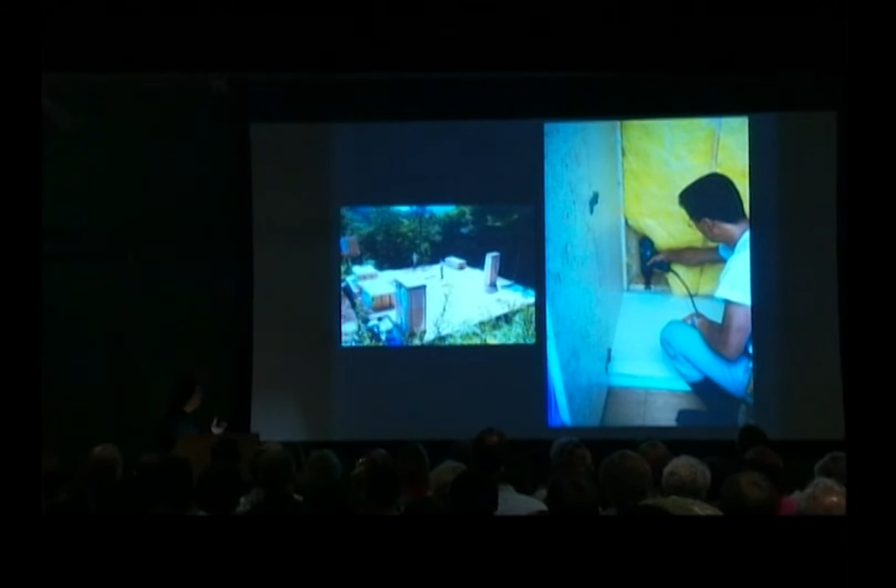This is the prototype. The width is 3 feet, the height is 8 feet, and the depth depends on the type of furniture. Insulation is already installed, painted inside and outside. Next, please. We just make the basic foundation. I bring in the already built furniture and connect the furniture with the foundation vertically and horizontally. Next, please. In one day, all the furniture units are installed. Next day, we put the roof on and finish the inside.

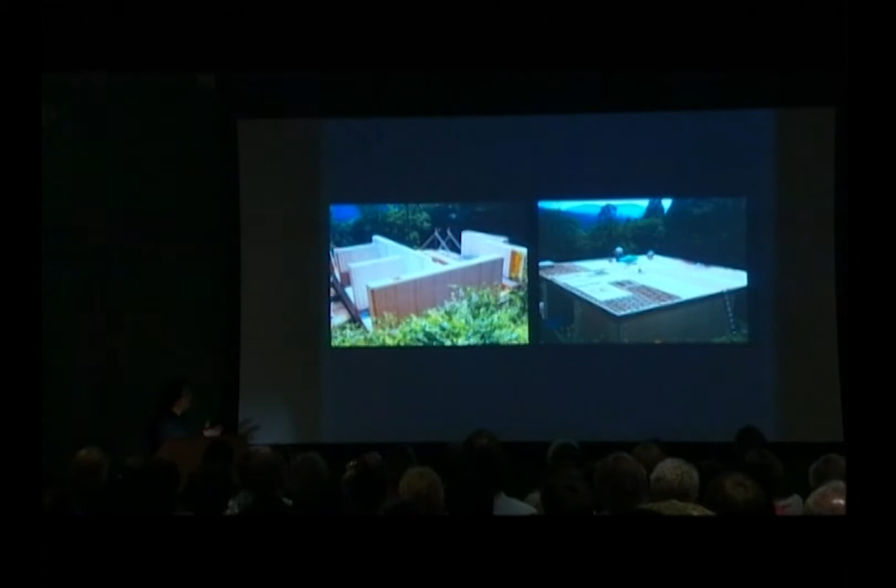Next, please. And we don't need to depend on skilled carpenters. Anybody can build it very easily. Whatever you see, the cabinet, bookshelf, all of them are structure. Next, please. Also, I used the same idea differently in China when I was asked to design a house there, because I was not allowed to do the construction administration. So I decided to use this furniture system because I don't have to supervise the construction. I just have to supervise the quality of the furniture in the factory.

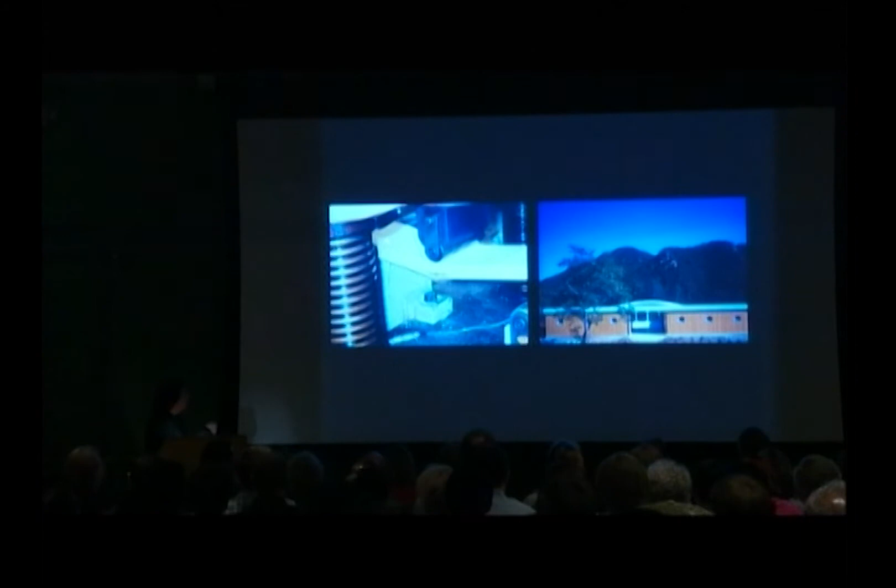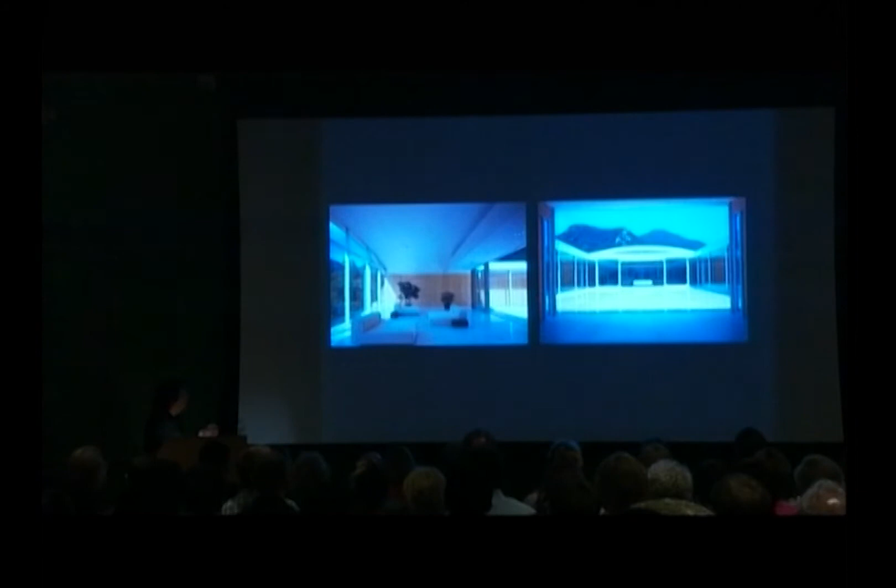Also, I wanted to use some local material since timber was rather expensive in China. And I found some plywood made of bamboo. So I decided to make laminated bamboo, and I made some samples and brought them back to Japan to test. Laminated bamboo was much stronger than wood. So this time I made the furniture structure with laminated bamboo, and the finish outside, and next please, also inside, everything is finished with bamboo. So structurally, it's furniture made of bamboo and finished with bamboo. Next, please. And this is a recent furniture house built in Long Island, in Sagaponack.

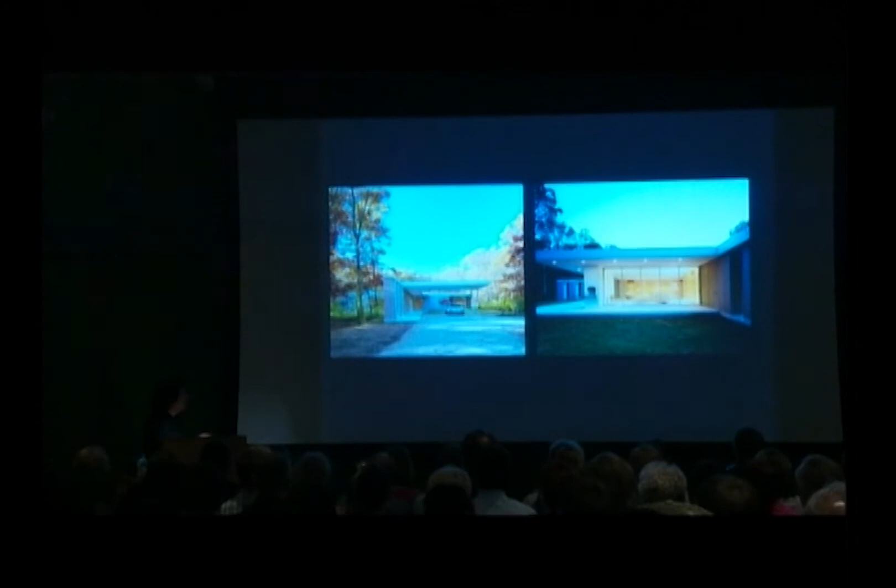This house further develops the furniture, because in the previous system the furniture was made of the so-called 2x4 balloon frame structure with plywood. This time, next please, there are no frames. There is only plywood with a finger joint. So three sides of the furniture itself support the vertical force and the lateral force. There is no framing inside of this furniture.

Next please. And also the furniture idea was further carried on to other projects. This is also a recent project. It's a library for a university. I was asked to make a rather classical order because all the other buildings on campus are classical brick buildings. And when I designed this library, I put all the bookshelves right and left, and the middle part is the reading space, atriums.

Next, please. This atrium has floating meeting spaces and classrooms, and on both sides of the building, next please, there are the shelves. Actually, these are precast concrete shelves. We just put in steel shelves to make the bookshelf like this. So this precast structure is used as a bookshelf to support the floor by itself, so that without any other structure, the bookshelf itself becomes the main structure of the building.

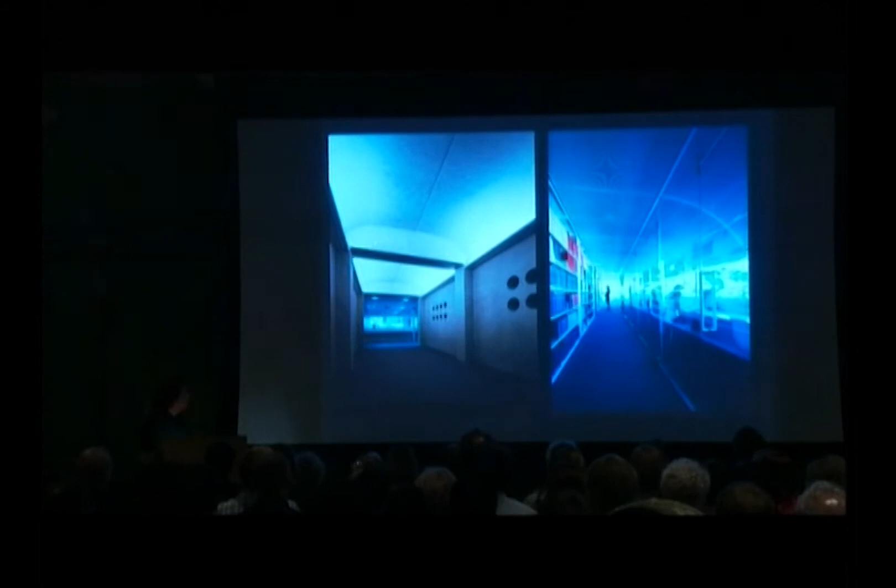So my idea is using shipping containers as the main structure. These are used shipping containers. We just borrowed them from the other side of the river in New Jersey. We used local containers only during the period of the exhibition. Then after we dismantle, we return them to the original place. So we don't have to carry the containers, because this is an international standard. Wherever we go, we can borrow local containers.

It's the same standard. And I made a checkerboard pattern in order to minimize the number of containers and minimize the weight of the building itself, because it was built on a very old wooden pier, and also to create shadow to emphasize the three-dimensional nature of the container. Next, please. And the roof is supported by paper tubes. The diameter is 2.5 feet. The wall thickness is 3/4 inch. It's 10 meters, about 33 feet long. And all the containers are connected with the standard container connections.

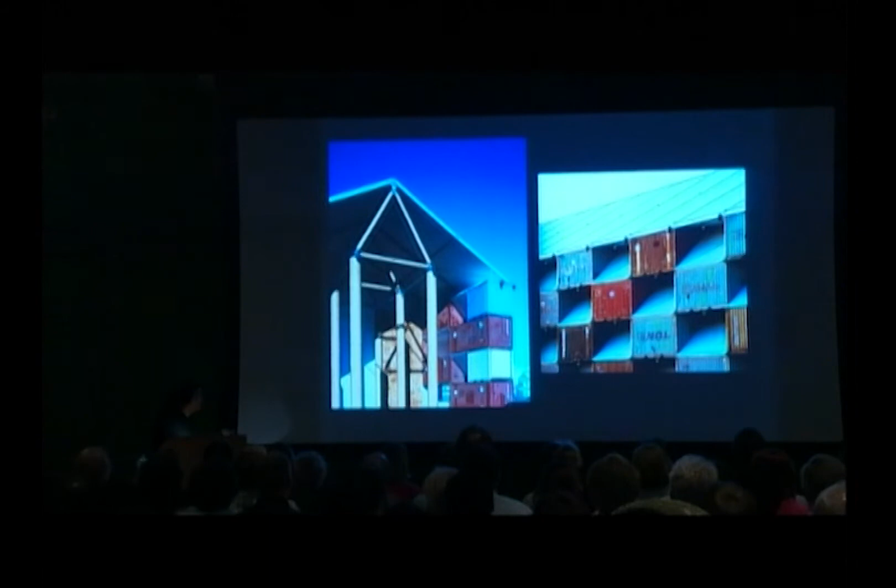Next, please. This is the main corridor with Gregory's photos in between the columns. Next, please. Then last year, the museum was brought to the Santa Monica Pier in Los Angeles, and the size of the site is different. In New York, it was just a linear building, but in Santa Monica, the site given was almost square. So instead of making one linear museum, I made two corridors. Also, Gregory asked me to expand the museum with an additional theater in between. So I put two linear galleries, creating a space in between. Without any additional containers, we just put the roof on to create a new theater space. As you see, the galleries are on both sides.

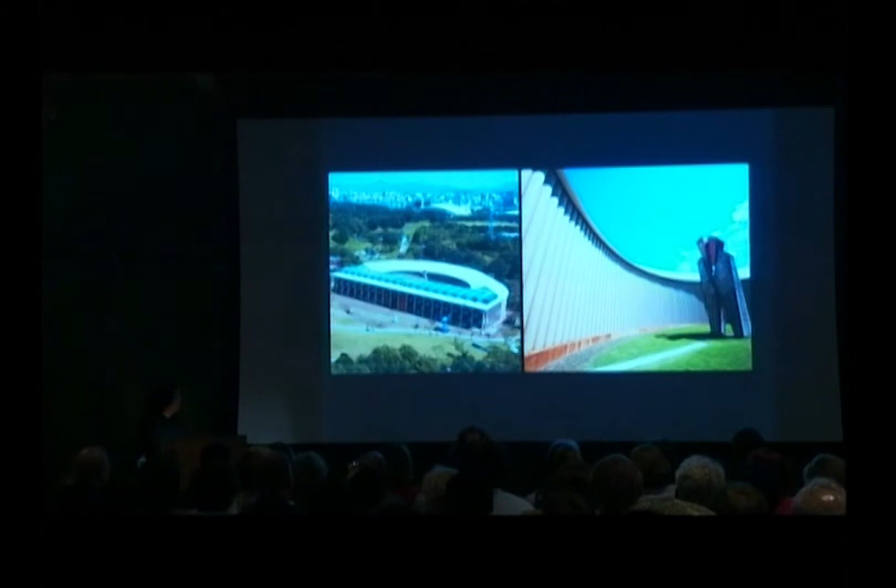Next, please. This is another temporary museum built in Seoul, South Korea. Because it's supposed to move, I made it out of paper tubes and also some 10-foot containers. This is the existing sculpture, in Olympic Park. Because of the shape of the site, and because I was asked to make two different galleries, I made a D shape, creating a gallery with paper tubes and a gallery with containers. Even the roof structure is made of 40-foot containers spanning the two walls. Next, please. This is the container gallery with 10-foot containers and 40-foot containers as the main beams, and this is the paper tube gallery with paper tube trusses.

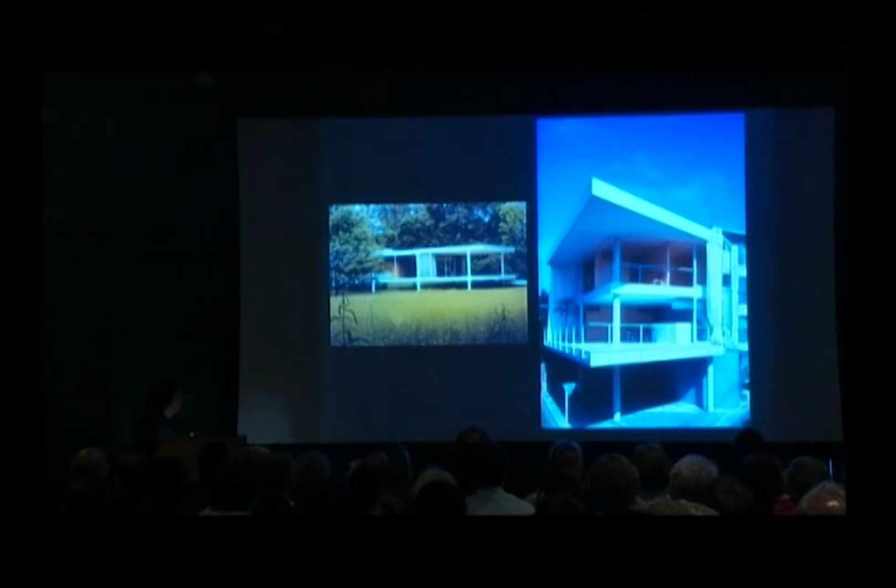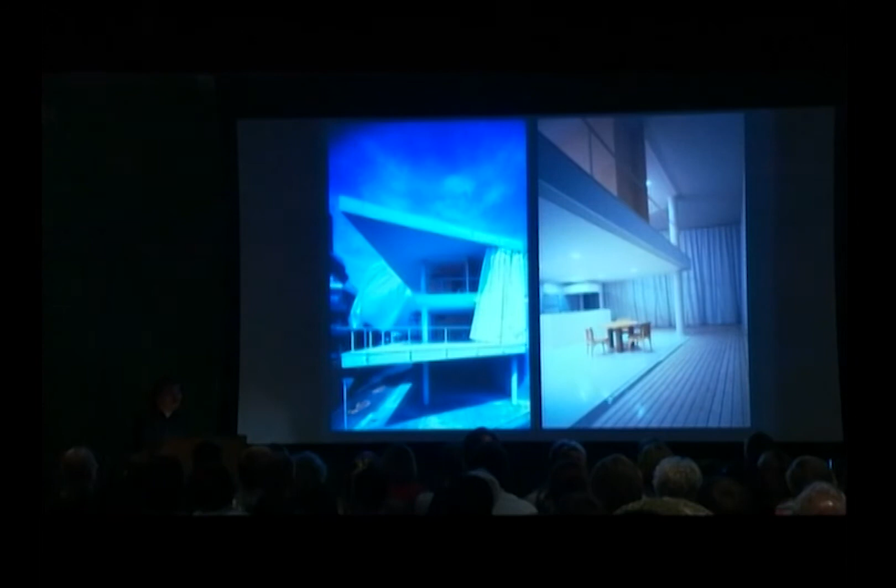Next, please. So this curtain works as shading and also to keep privacy. And when the curtain is blown away, you can extend the limit of your house to the street. And in the evening, when you close the curtain, the space is three-dimensionally connected. Also, as you know, Mies van der Rohe is the architect who invented the so-called curtain wall. Curtain wall is glass with metal frames for the building. Instead of using the Miesian curtain wall, I just used a curtain to design a curtain wall house.

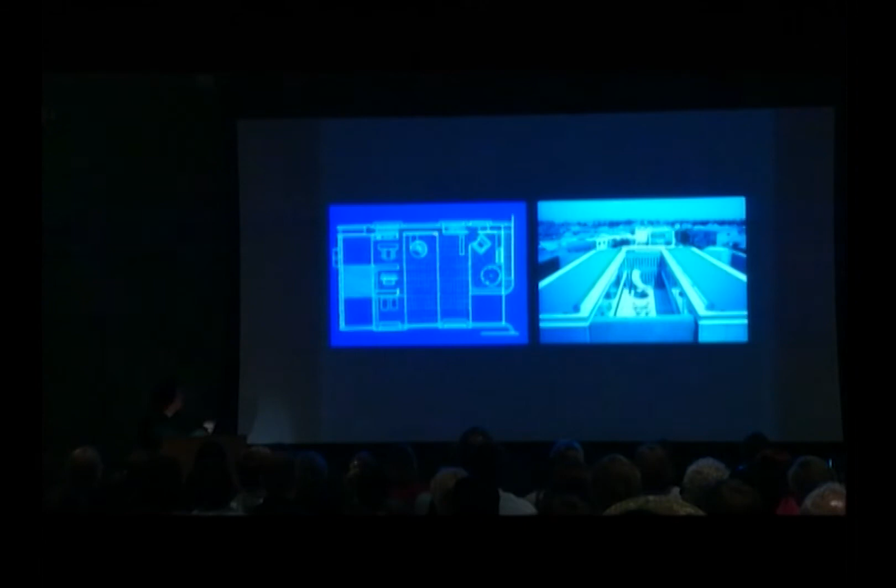This is a house called picture window house. Usually a picture window is a square window on the wall, framing a beautiful landscape like a painting. Instead of making the square picture window on the wall, I made the building itself a picture window to frame the beautiful horizontal ocean view.

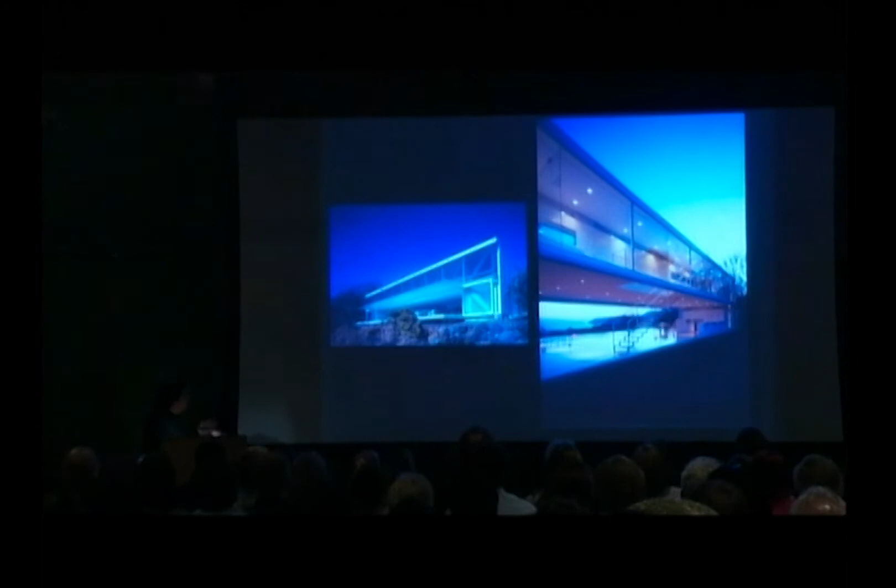So the second floor works as a kind of truss with the bedrooms, spanning from side to side, and when you open up all the sliding doors, front and back, the garden is connected with the indoor, and then it's connecting to the ocean view. Next, please. As you see, this is a horizontal picture window when the sliding door is open. Next, please.

Then I wondered whether this column is really structure or not, because the wall can be structure, and you maybe don't need columns. So I calculated the building with just columns, without any walls, and I found out there are enough columns to support the roof. Then I calculated just with the walls, without any columns, and there are also enough walls to support the roof. So structurally, the meaning of the columns and the wall is quite ambiguous. For this wall-less house, I tried to clarify or investigate the meaning of the fundamental architectural elements, like column, wall, floor, roof, and so on. Next, please.

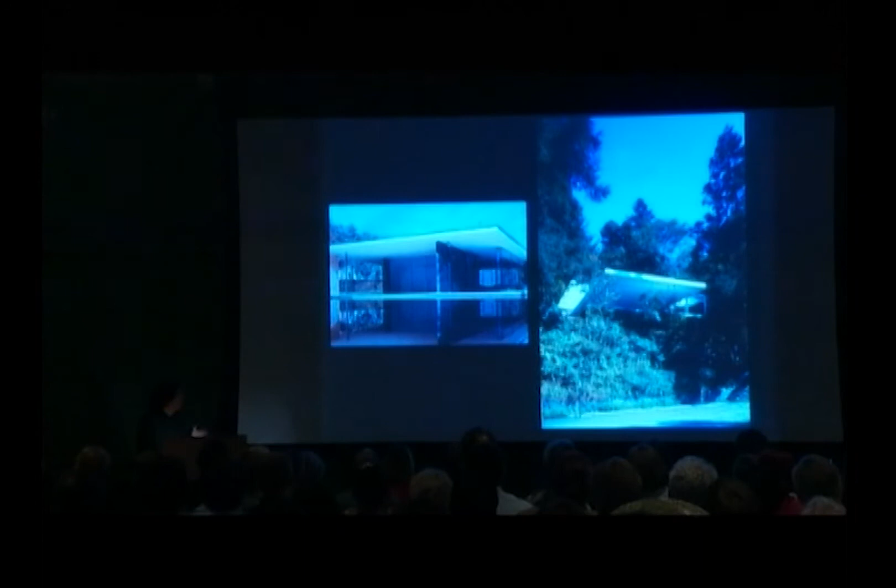And as this house was built on the hill, usually when you have to build on a hill, you have to make a floating platform. But I didn't have the budget to do it. So what I did is just dig half of the ground and put the mud in front to make a flat platform. However, the hill still continues this way. So this wall usually has to be a cantilevered concrete retaining wall to support the pressure of the earth. Instead of making a cantilevered concrete retaining wall, I just made this concrete floor curved.

It's just an upside-down arch, so that the pressure of the earth is naturally transferred to the floor. So this curvature has a structural meaning. It's not a cantilevered heavy retaining wall. It's just part of the floor, curved to transfer the load naturally.

And three sides of the house are just sliding glass doors, which can be opened. This canopy can come down to close the window when nobody is here. So we just open up the canopy and open up the sliding glass doors to extend the inside of the house outside.

And there are only 3 very thin columns, only 2-inch diameter. In Japan, we have lots of earthquakes. It's usually impossible to have such a small column. So obviously, since it's so small, it's carrying only vertical force.

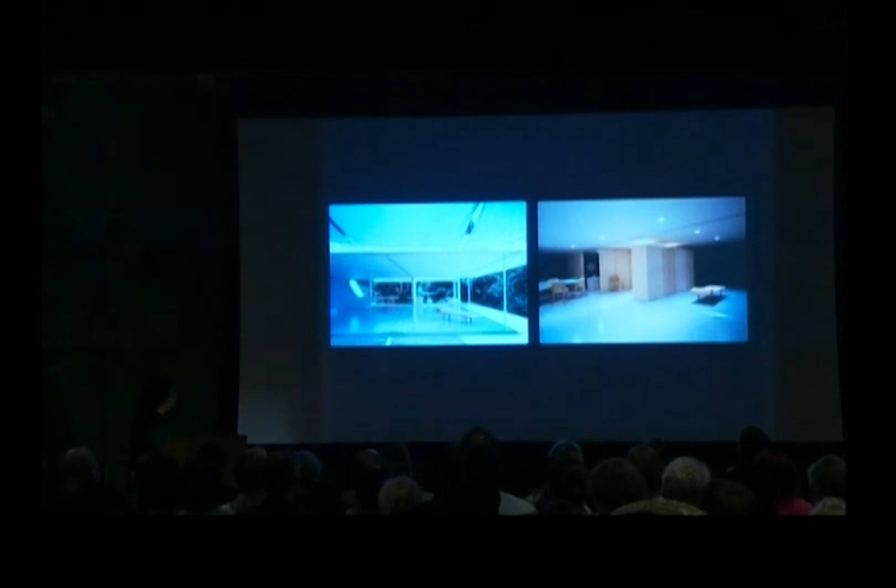This is a house called the 9 Square Grid House. There are 2 parallel structural cabinets, creating 1 square floor plan, which can be divided into 9 small squares. These are sliding doors. You can open them to have 1 big square floor, or divide it into 9 small squares, or into linear spaces or middle-size squares. Depending on the occasion and the season, you can divide the house differently.

Here only 2 rooms have a name: the bathroom and kitchen. Other than that, there is no room with a name, like bedroom or living room. This could be the bedroom in the summer, on the northern side, which is cooler. But in the winter, you can put your bed on the south side of the house, which is warmer. In case you fight with your wife, you can separate the bedrooms.

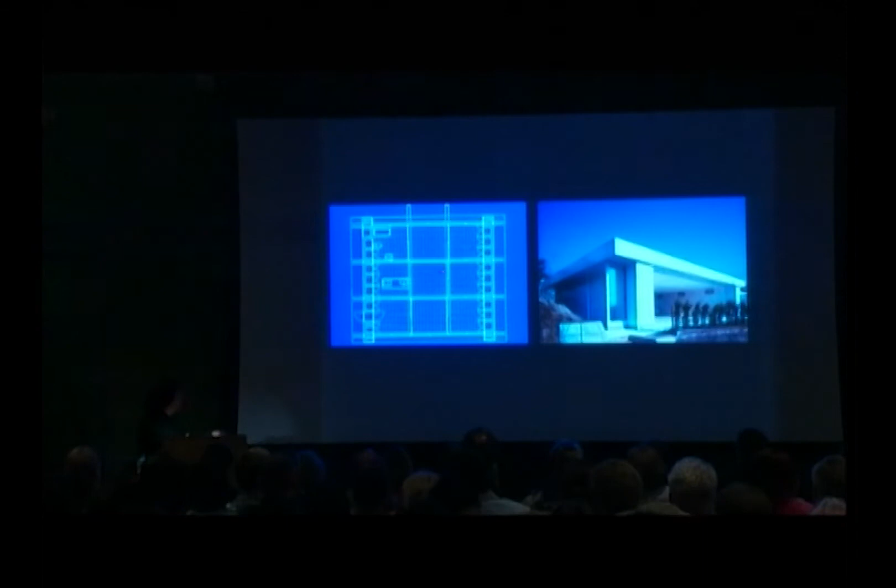Next, please. As you see, this is just 1 square space with all the cabinets, the air conditioning, everything inside the structural wall. You can divide it into small rooms.

Next, please. This is the Paper Art Museum, the first phase. There are 2 projects. The first phase was renovating an old factory into a gallery, and the second phase was building a new building. In the first phase, the budget was very limited. What I did was only limited things: removing the existing wall, exposing the existing steel columns, and putting in a standard overhead garage shutter with fiberglass panels.

Usually, with an overhead shutter, when it's open, it comes inside the space. But instead, I put it the other way around. So when it's open, the shutter goes out like this, to create a nice canopy connecting inside and outside with some intermediate space in between. So it's nothing special, just a standard element used differently.

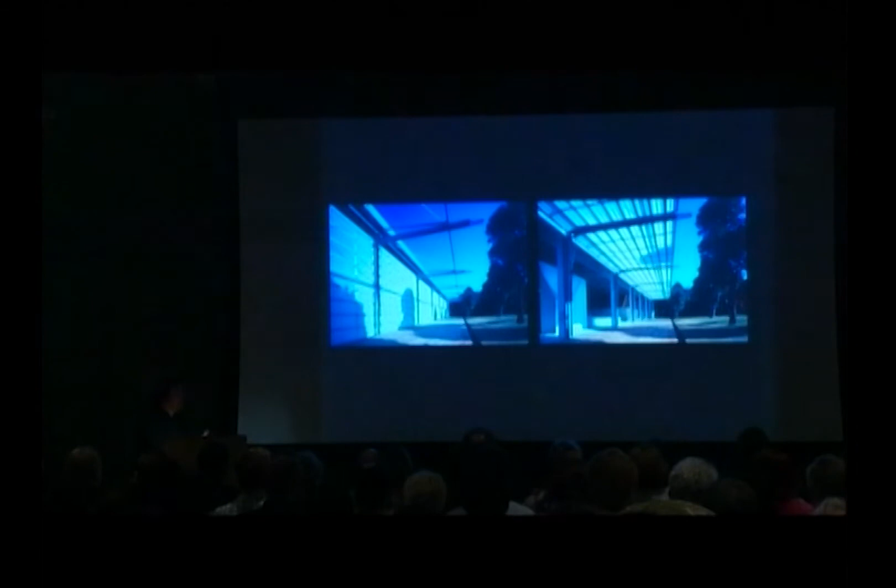Next, please. This is the second phase of the Paper Art Museum. It looks like 1 building, but actually there are 2 individual structures: on the south side, 3 floors of administration, and the northern structure is 3 stories of galleries, connected with a bridge and a membrane roof. This is another industrial shutter with double-glazed fiberglass panels. When the museum is open, it's just open, and this semi-indoor, outdoor space can be used for exhibitions.

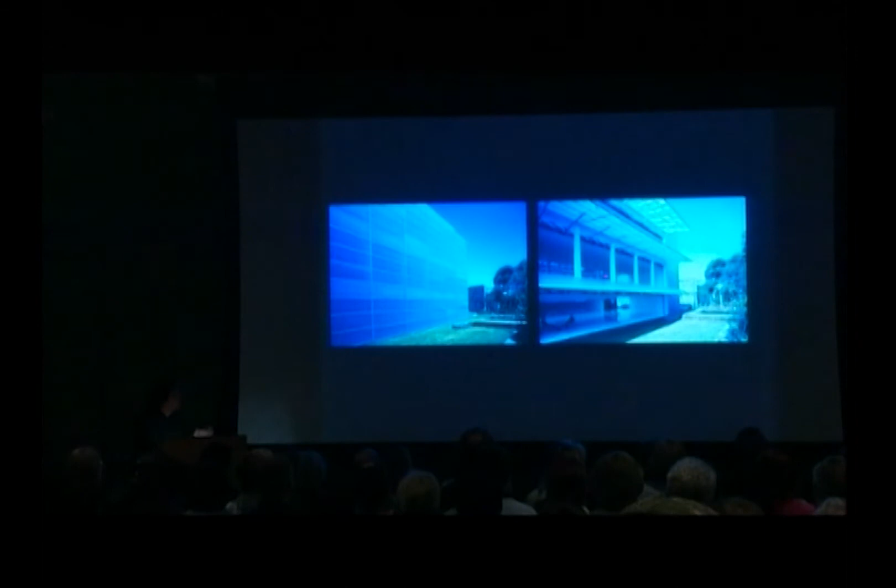Next, please. On the south side, the administration part, you can open up this lightweight fiberglass panel to make a canopy, and also open up all the sliding doors to enjoy the garden.

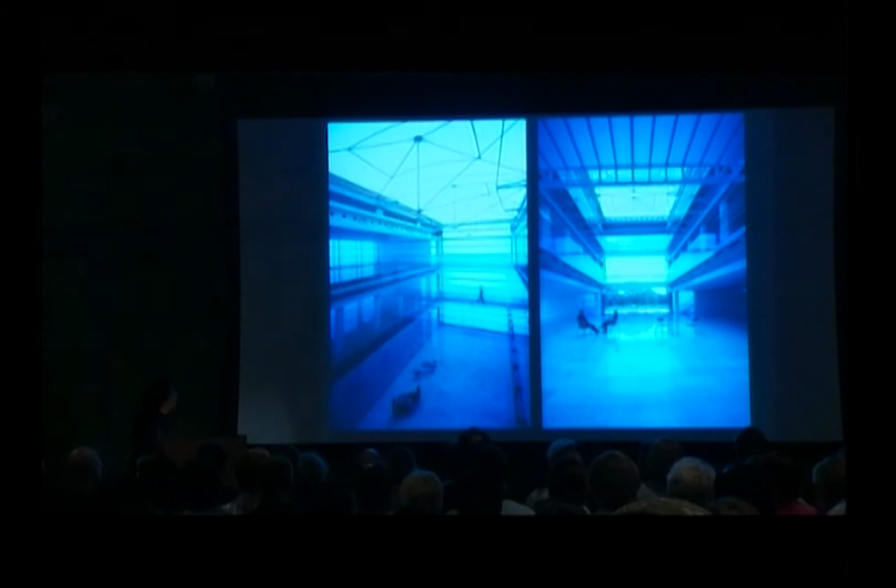Next, please. Also inside, when the museum is closed, this shutter comes down, and these glass sliding doors open totally. When the exhibition is bigger, we can use the big square space for the exhibition. It depends on the type of exhibition you are bringing. Next, please. This is a small restaurant in Tokyo.

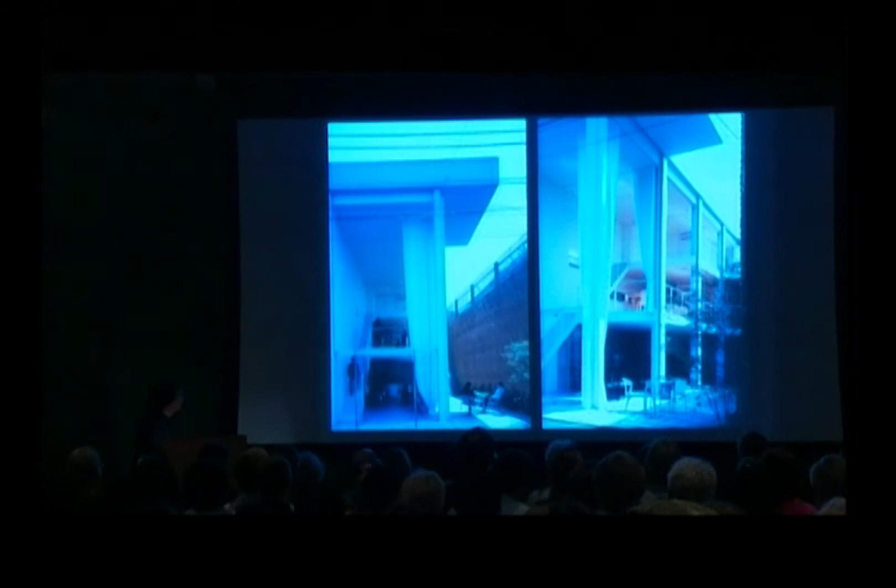Next, please. This is another house for the photographer. I call it Shutter House for the photographers. And because the site is rather very enclosed, a dense area, there's nothing to see outside. Also, it's difficult to keep the privacy. So it's rather a closed house. So I prepared several different small courtyards inside of the site, connecting the inside of the house with the courtyard. And this outside wall, all of them are glass shutters.

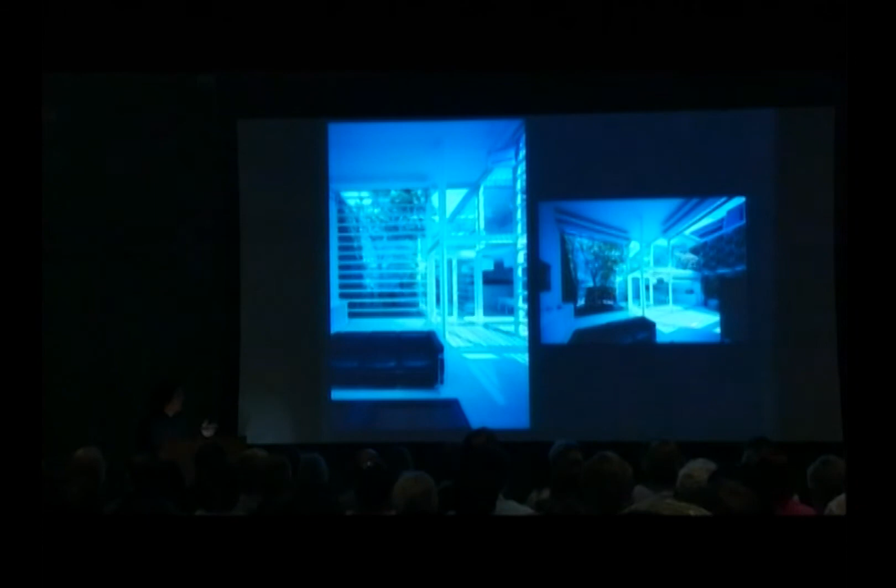Next, please. So when the glass shutter is closed, you just see the courtyard outside, but when it's open, the living room and dining area is totally connected with the courtyard in front and also the side. All the floors are totally connected as one open floor with the living room, dining room, kitchen and so on. Next, please.

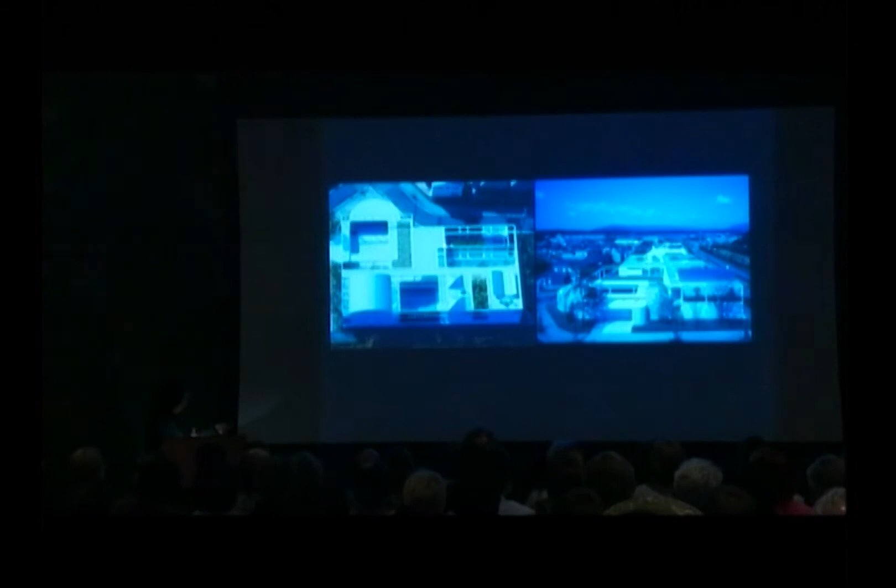This is another house. It's a rather big house, over 12,000 square feet. This is quite a big house for Japan. And this is the porch and parking, living room, swimming pool, bedrooms and courtyard. I want to see the courtyard from everywhere. And this is the grandmother's quarter, the family room and kitchen. Next, please.

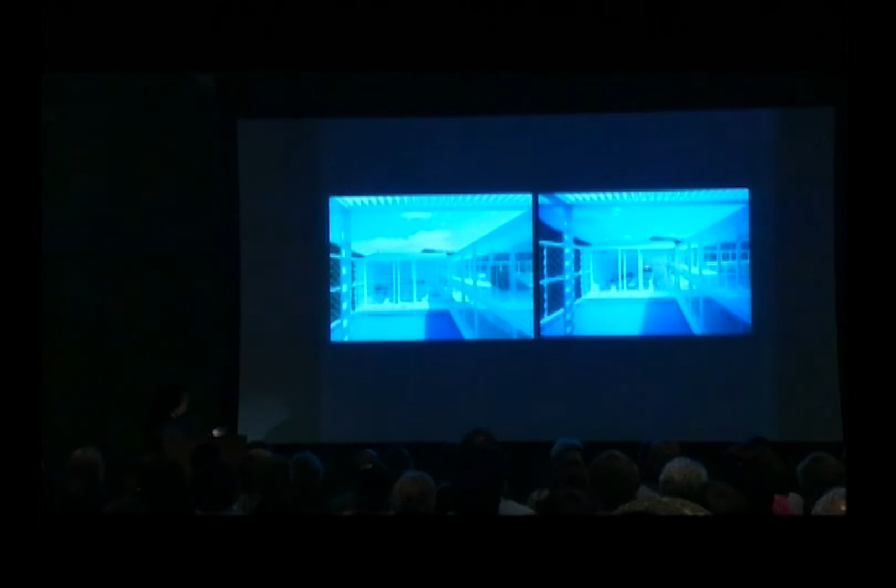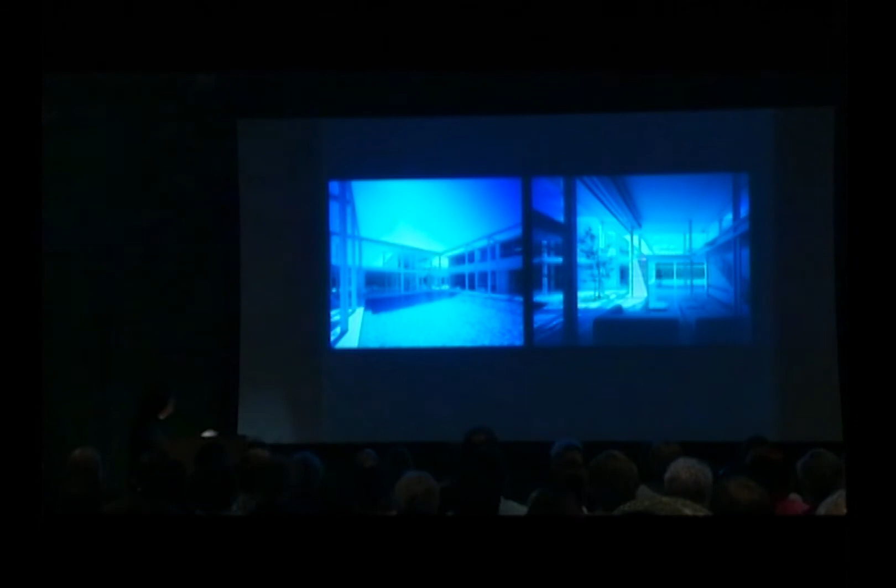This is the entrance porch. You come into the entrance. Next, please. Then this is the main living room. And again, this is the glass shutter. When it's open, the living room is totally connected with the swimming pool. You can jump into the swimming pool from the living room directly. Next, please. And this is the family room. Again, this is the shutter connecting the family room with the landscape outside.

Next, please. This is the most recent project, just built in Ginza, Tokyo, the most expensive land in the world. And sorry, this is not a professional photo because it's just finished. This is a building for the Swatch Group in Switzerland. Swatch, as you may know, owns many brand names like Omega, Tissot, Calvin Klein, Blancpain, Jaquet Droz, whatever you name it. Most of them are Swatch Group.

And this was an international competition. I was very lucky to win because I didn't respect the program. I usually respect the given program, but this time I thought that the program given was not very nice, and I took a risk to propose something totally different. This is a building for 9 different brand name boutiques, Swatch, Omega and so on, and also customer service, office, and an event space on top.

And the given program said because of the narrow width of the building, they can have only 2 boutiques on the ground floor, 2 on the second, 2 on the third, 2 on the fourth, and the basement, so that only 2 boutiques have a chance to be exposed to the street. I thought that is unfair for the boutiques which have to go to the basement or second, third, fourth floor, but that was the way it is. Then I just made my own. I took a risk to just change it totally.

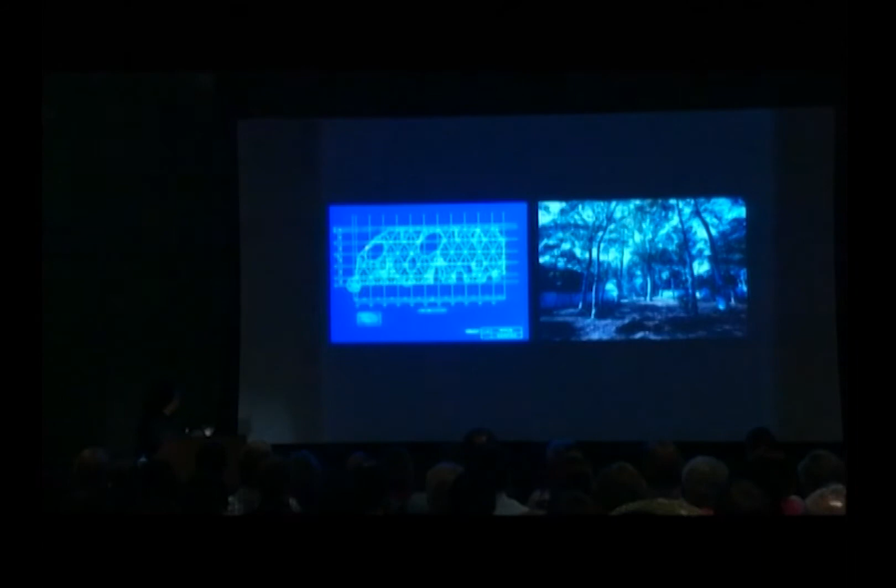Let's say if you have the usual square grid, there are 4 beams intersecting to support the columns. At least you need 3 beams to stiffen the columns, so you can eliminate only 1. But because I took the triangular grid, 6 beams are intersecting, so you can still eliminate 3, with the remaining 3 beams stiffening the column. So because of 6, you have more freedom to eliminate whichever you need to remove because of the condition of the trees and the roots, so that I could have the openings wherever the trees are.

Next, please. This is a 3-story high duplex apartment. There are 11 apartments. Each one has its own entrance on the ground floor in the pilotis. This photo was taken in the winter. That's why you can see the holes. But in the summer, the leaves cover all the roof, making shading on the roof. So it's very cool in the summer.

Next, please. This is a house called Naked House. The house was built in the middle of a rice field, and the request of the client was very unique. First of all, they said they want to have the house like a greenhouse, which exists in the neighboring area, and also they want to have a big living room, a common space to share with their family members. They said they don't need a big private room with privacy, because they like to spend most of their time in the big common space.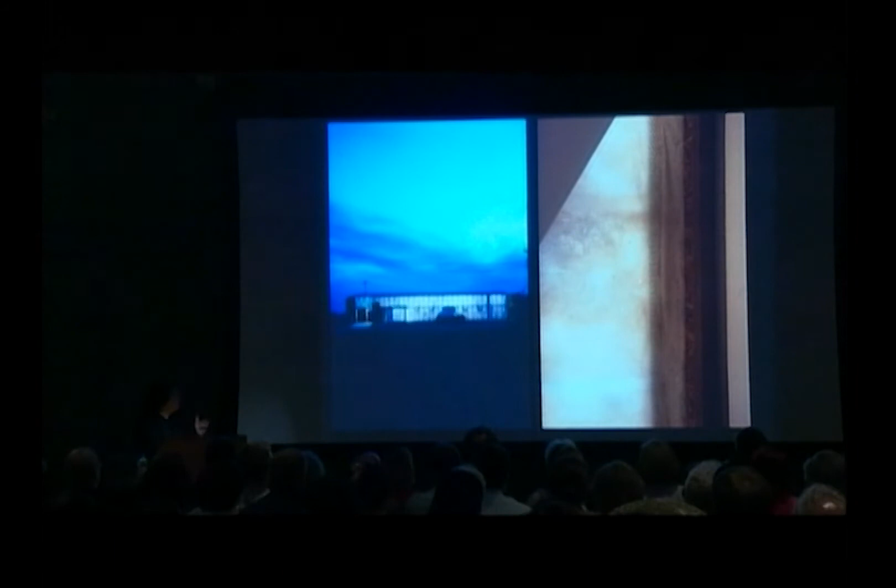And because they wanted a house like a greenhouse, I used the material used in greenhouses. This is the corrugated fiberglass panel, but I made 2 layers, vertically and horizontally, to stiffen each other, and also to keep the air gap in between for insulation. And inside the wall, I made my own translucent insulation material using noodle-shaped foam core, which is usually used for packing fruits, put in clear plastic bags. And I made an extra layer with bubble packing material, but still translucent. Next, please.

So inside, as you see, the wall is all translucent. And there are 4 small individual spaces with traditional Japanese tatami mats. The 2 sides of each room are made of sliding doors, which can be removed to connect all the rooms together to make linear tatami rooms. The grandmother doesn't like air conditioning. Actually, it's impossible to put air conditioning inside the movable box. And the small child likes air conditioning. These are the air conditioning units for the common space.

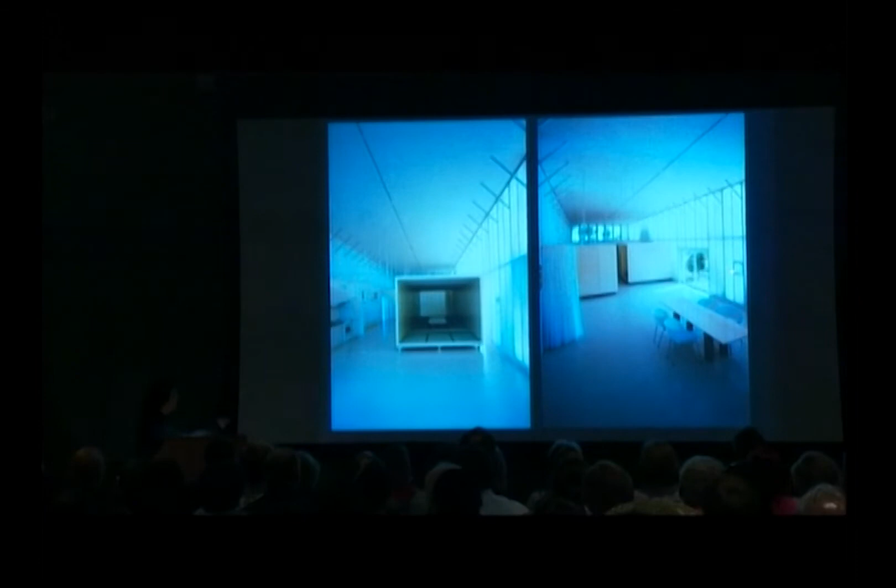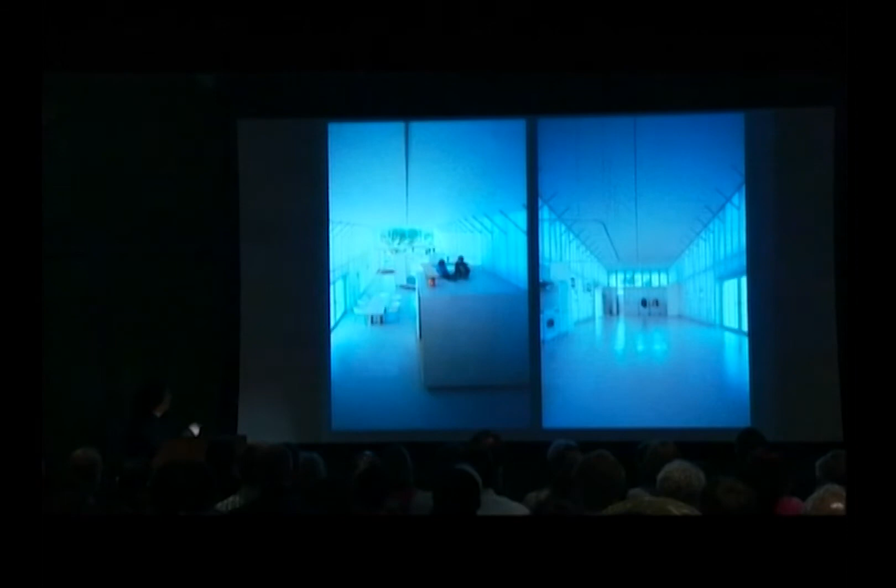So if you want to have your air conditioning, you just move your box, attaching it to the air conditioning, so that it becomes your individual air conditioning. And there is no window, but if you want to see outside, you just move your box to the window. It becomes your private window. Next, please. And all the boxes can go outside to the garden. Sometimes they hold a lecture, so it's a totally open space, and kids can play and study on top of their own boxes. Next, please.

This is a 6-story office building in Osaka, Japan. This time I invented fire protection for steel in wood. This is a picture showing the testing process to get government permission. I took advantage of the characteristics of wood as fire protection. This is a steel column with plywood. I wanted to use the wood as fire protection for steel and also as the final finish of the building itself, so that we can eliminate many materials.

Usually we have to spray ugly fire protection, and this has to be covered by gypsum board, and you finish with wood, timber, stone, whatever. So there are many layers. As you know, wood doesn't transfer heat easily. So first of all, the heat is not transferred to the steel easily. But when the temperature goes much higher, of course, wood can be burned.

Then it becomes charcoal, and the charcoal is a perfect fire protection material. So I tested this method, and I found out 1 inch thickness of the plywood works as a half-hour fire protection, and 2 inch thickness of the plywood works as 1 hour fire protection.

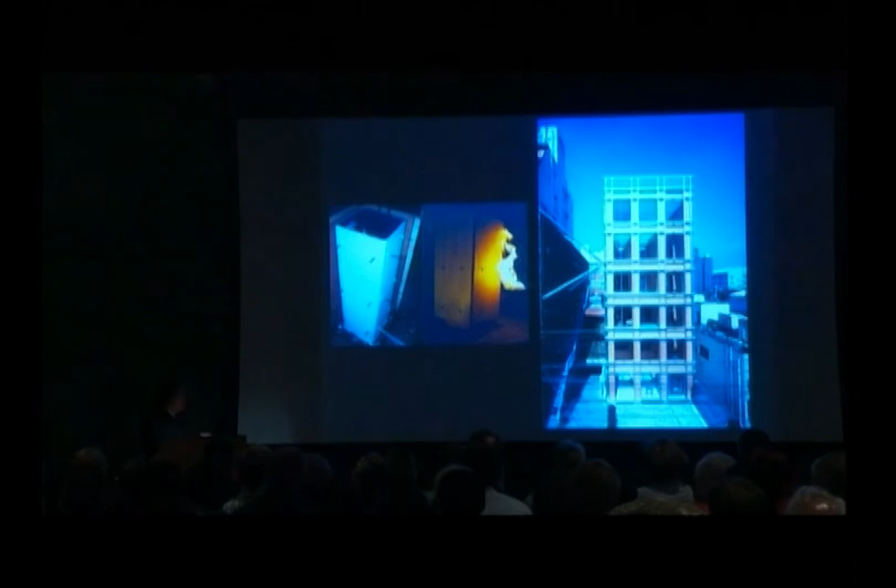Next, please. So the building was finished with this plywood. Depending on the level, the thickness has to be adjusted depending on the fire regulation. So this then works as the final finish of the interior itself.

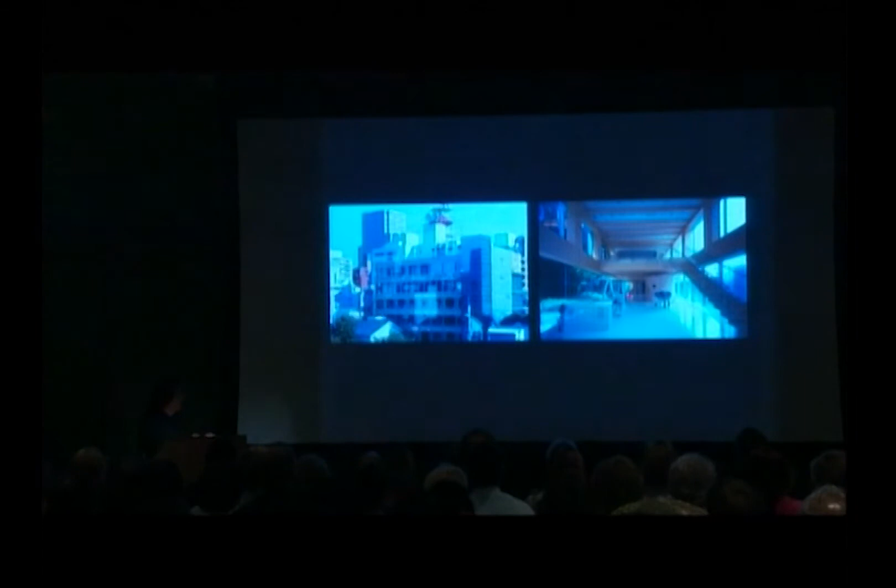Next, please. And also I work with plywood because plywood is so cheap and strong. I made a kind of pre-bent arch with the plywood. It's called LVL, laminated veneer lumber, to make a kind of woven feeling with the vertical and horizontal plywood. This is a small daycare center for the hospital.

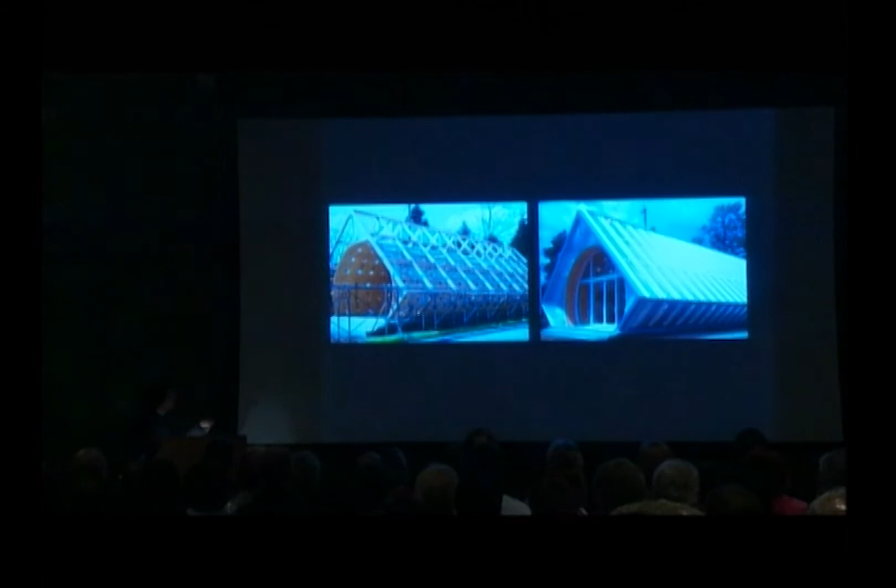It's in northern Japan with heavy snow, and because it's so thin, it can be deflected by wind. I put the timber frame connecting with the steel lattice truss, stiffening each other, and finishing with corrugated stainless steel and fiberglass material to bring light inside.

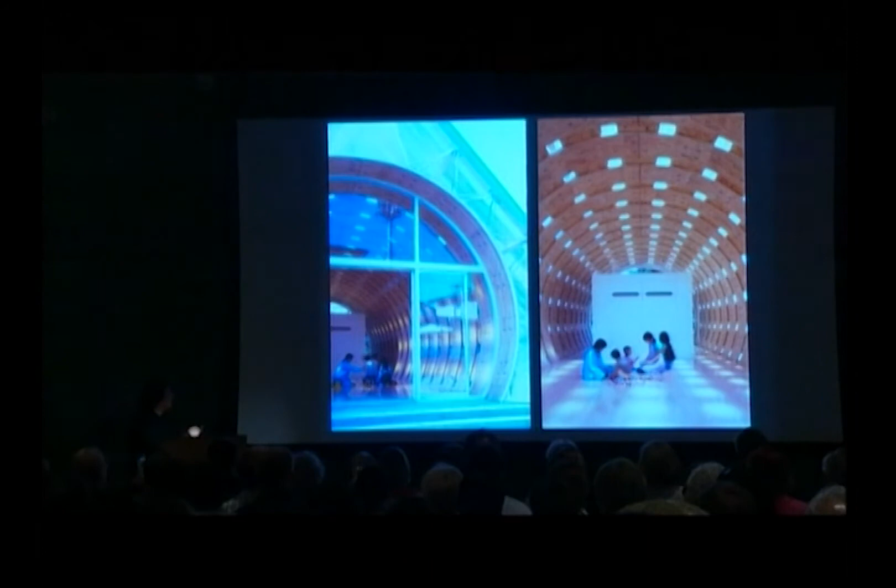Next, please. In the summer, through the space gap between the square and the round shape, we just ventilate hot air, and in the winter we keep the hot air inside for insulation, and natural light comes into this daycare center.

Next, please. The same hospital asked me to design the gymnasium. Because it's a residential area, I didn't want to make a big volume on the ground. So I put the main body of the gymnasium underground, and I just put the roof on top of the ground. And again, I use the LVL. I try to minimize the quantity of the timber.

This is a sectional diagram explaining the roof structure. In the longitudinal section, you put the arch following the diameter, so that all the sections follow this curvature. Perpendicular to that, the curved arches are put in parallel, so the section is always horizontal. It doesn't follow the curvature. With the two layers, at the bottom and top there is a gap because this one is horizontal. And I put small timbers to create the truss.

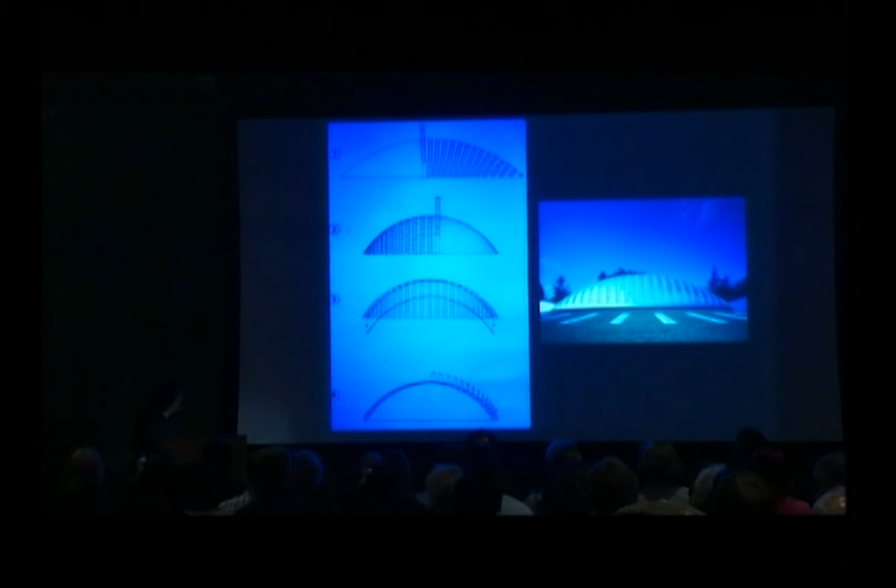Next, please. So as you see, the pre-bent arch follows the curvature, and perpendicular to that, it's almost horizontal, creating the gap and creating the truss with the additional timbers. And there is space to bring natural light inside the gymnasium. Next, please. And the wall is translucent, bringing indirect light into the swimming pool.

Next, please. This is a presentation I submitted for the competition of the Pompidou Center in Metz. Metz is a city near Germany, east of Paris. The site was quite big, and this is a site plan with the main train station, a very famous cathedral, and downtown, the old town. Our site is the other side of the train station. It's a kind of open space, there's nothing around.

First of all, I worked with the landscape architects to design the park. Usually we design the building and ask the landscape architect to put the trees around, but I did it the other way around. I asked the landscape architect to put the green park, then I put a big roof on top of the green, because I wanted to make the inside of the museum an extension of the park.

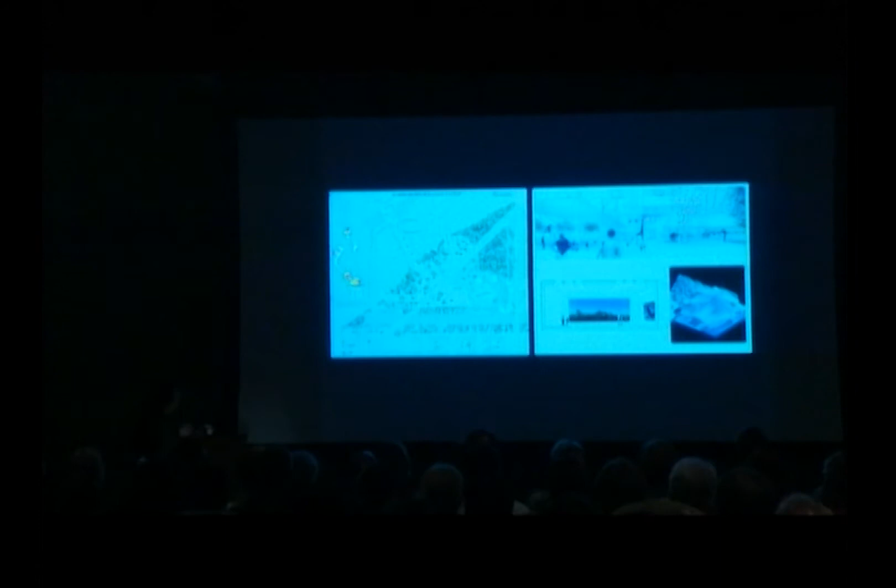The second tube is heading to the main train station. This main train station was designed when Metz was occupied by Germany, so this is a very interesting German architecture, and it became part of the city's monuments. So the second tube is framing the train station, and the third one is framing the future sculpture in front of the train station.

Next, please. And this is showing the development of the roof structure. This is the building in computer graphics. The construction started last November and is supposed to be finished at the end of next year.

The idea of the roof came from the traditional Chinese bamboo hat. When I saw this Chinese hat, I thought this is very architectonic, because woven bamboo is the structure, like a roof. And the oil paper is the waterproofing, and underneath there are dry leaves as insulation. It's just like a roof. So I used this pattern and designed a kind of wooden truss. And the whole roof shape itself is a hexagon, and also each pattern is a hexagon.

As you may know, the hexagon is a symbol of France. The shape of the country, France, is a hexagon, so for the French people, the hexagon is their symbol. But if I do the competition in Israel, I make a different story. Next, please.

I made my temporary office on top of the Pompidou Center, designed by Richard Rogers and Renzo Piano. And this is a temporary office built by students. I brought my Japanese students to work with French students during the summer. We spent 3 months to build it by ourselves. Next, please.

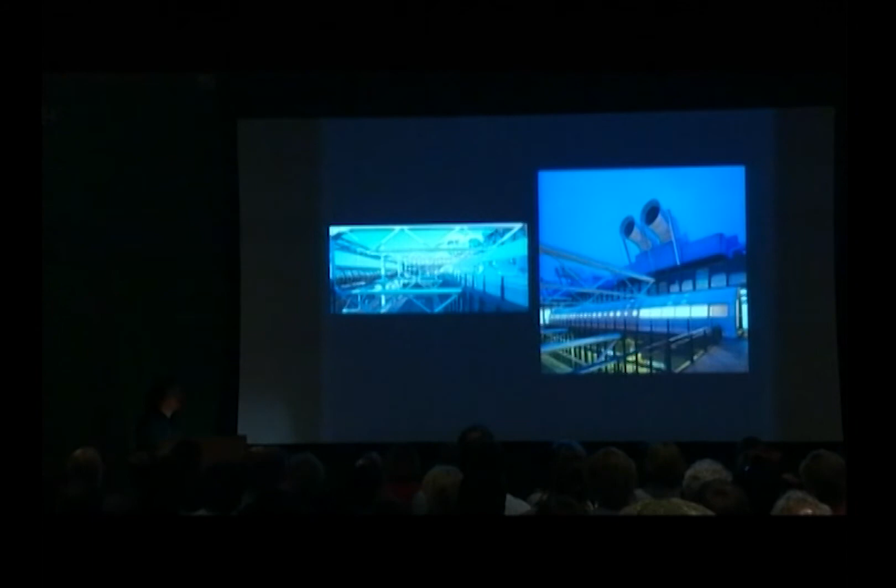This is a paper tube structure with wooden joints. And this is our drafting space. This tube was donated by the paper tube company, and we just brought student labor, so it's very inexpensive to build as a workshop.

Next, please. By the way, if you have a chance to come to Paris, you are welcome to come to my office. However, you have to buy a ticket to see me, because my office is part of the exhibition, so you have to buy a ticket.

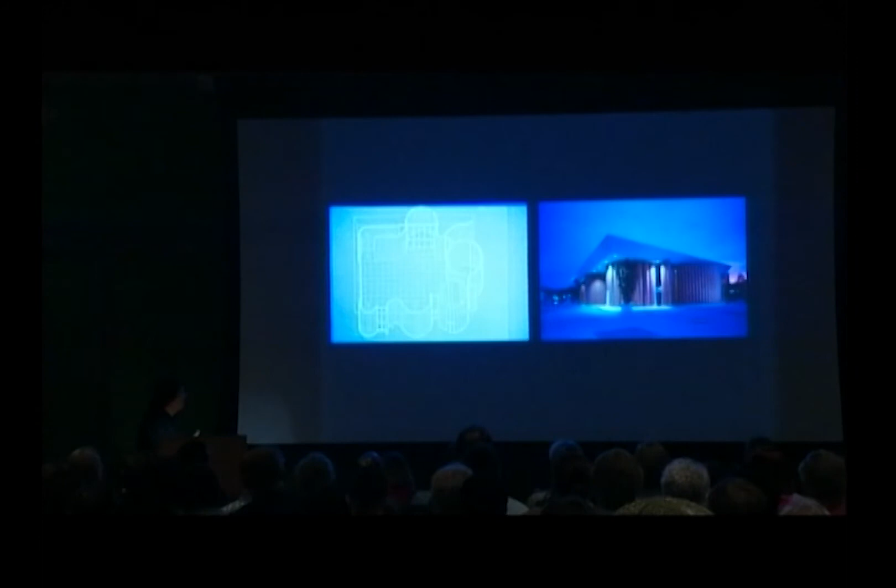This is a very early paper tube structure, 1990. Actually, I started developing paper tube structures in 1986. At that time, nobody was talking about recycling, environmental, eco-friendly, whatever. It's becoming very trendy. But when I was developing this, it was many years before this became fashion.

This time, I didn't have special permission to use paper as the main structure. So there are steel columns supporting the roof, and the paper tubes, 330 tubes, are used as the wall receiving the wind pressure. Next, please. And there is a big diameter tube here. There is a space in between with plastic molding to bring light inside.

And this is the big tube with a diameter of 4 feet, and the height is over 27 feet. Even this is used as a toilet. The ceiling is very high, so you get a very good sound effect. And also, in case you run out of paper, you can tear off the inside of the wall.

Next, please. This is the library addition for a poet's house, built in 1991. He was very kind to allow me to build it as an experimental house without permission. So I tried a new structure with paper tubes, with a post-tension structure. Inside it's empty, with a cable to put post-tension to connect the wooden joints with the paper tubes horizontally and vertically. It's still there, built 16 years ago, still in good condition. Next, please.

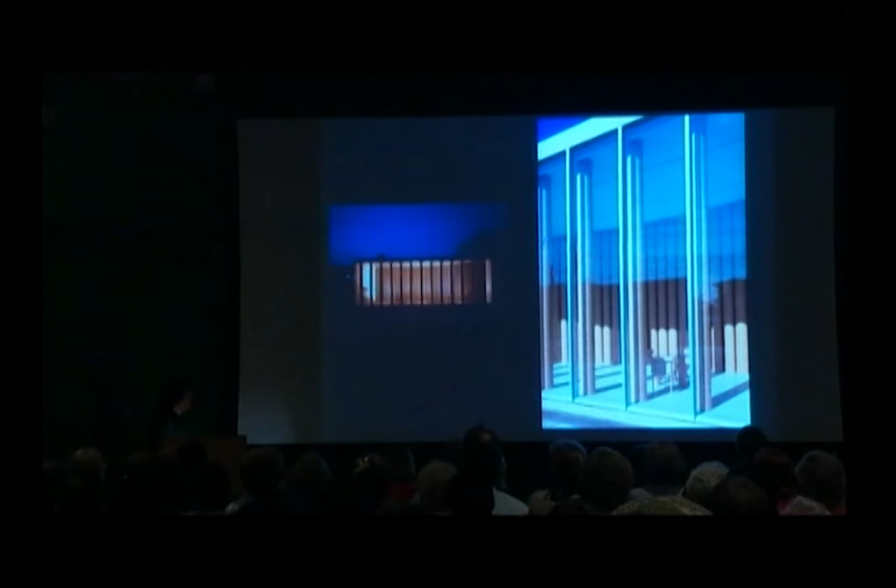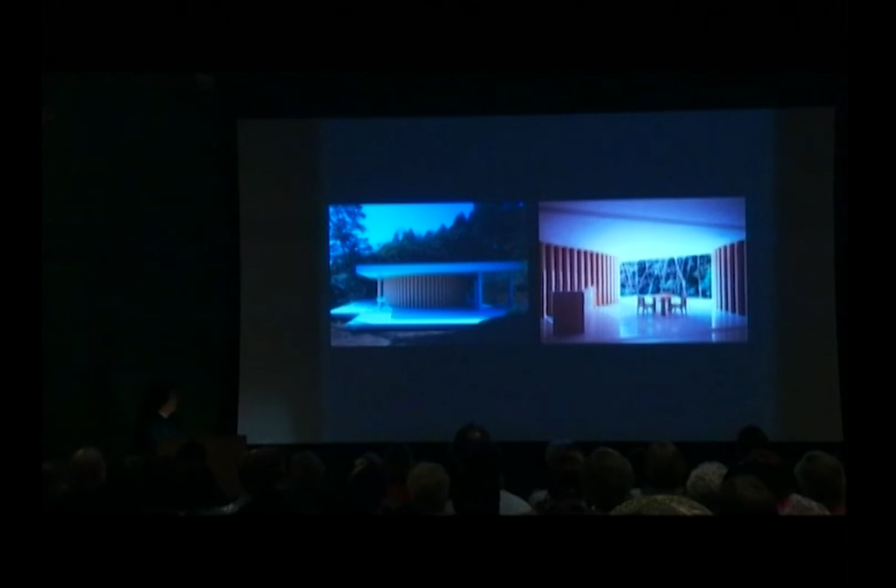Next, please. It's a simple building with a series of columns creating shadows, which move depending on the time of day, and also a curved wall with small gaps between the tubes, which create a nice linear light behind the wall. Next, please. Then finally, I could build my own weekend house, but it was too late. I have no more weekends, so I don't use it.

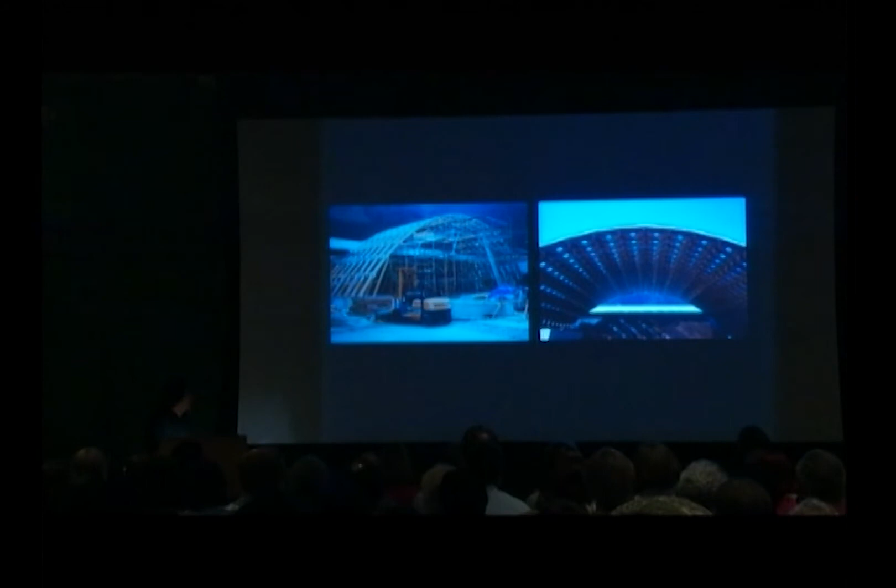Next, please. This is a structure for a timber company, built in 1997. This time I made an arch, a simple arch with wooden connections. Every time I design a different type of paper tube structure, I have to test it. I have to get government permission to build it. Next, please.

Then I was very lucky to be chosen as the architect to design the Japanese pavilion for the Hanover Expo in the year 2000 in Germany.

I was very lucky also to collaborate with Professor Otto to develop a paper grid shell structure. The main theme of the Expo is the environmental issue, so the government was expecting me to use a recycled material. But not only using recycled material, I set my goal of the design at the end, when the building was demolished. Usually the goal of the building design is when the building is completed. My goal was when the building was demolished.

Because we make a lot of temporary pavilions for the Expo, and we dismantle them and create a lot of industrial waste after the Expo, I wanted to recycle or reuse all the building material after we demolished the building. So I worked with a local paper chip company. After we demolish, they collect the paper to recycle again.

And this is the picture showing you the process of lifting the grid shell structure made of paper tube. I didn't want to have the joint connection because it's rather expensive. It's a very long 20-meter, 66-foot-long paper tube carried through the highway, just connected with fabric. I'll show you the detail later.

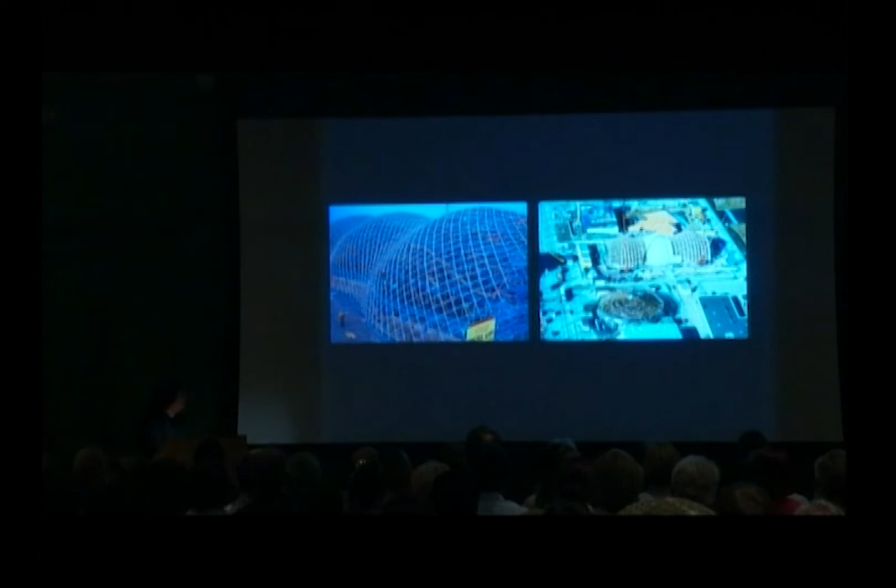And there is only one high-tech use for this construction, which is GPS. Every day we have to check the change of the shape, but this is too big and too complicated to measure from the ground. So we put 10 antennas and measured the change of shape from satellite every night to check the progress. And also I invented the membrane out of paper. It's a fire-protected and waterproof membrane according to the German regulation. Next, please. And this is the completion.

Next, please. It's inside. I must say this is not a pure paper tube structure because I had to make many compromises in the structure, because of the regulation. I tested everything and we calculated with a very good engineer, Buro Happold in England, and we proved everything according to German law for the building regulation and the fire regulation. But still, the authority didn't want to allow us to build as we designed.

Actually, this is the wooden grid, which was proposed originally by Otto. It was much thinner, as an element for stiffening, triangulating the paper grid shell by this wooden frame, and also used as a scaffolding ladder for the construction and maintenance. But we were asked to make the section of this wood frame 4 times bigger than necessary, so now the timber is working as an arch. So I must say this is a hybrid structure between paper tube and wood.

Next, please. But the quality of space is as I was expecting, so I'm quite happy. This is just a simple fabric tape joint, very simple. During the erection, this opened up and it's stiffening by itself. And the end wall is made of paper honeycomb board. This was the first time in Germany to use paper honeycomb as a part of a structure.

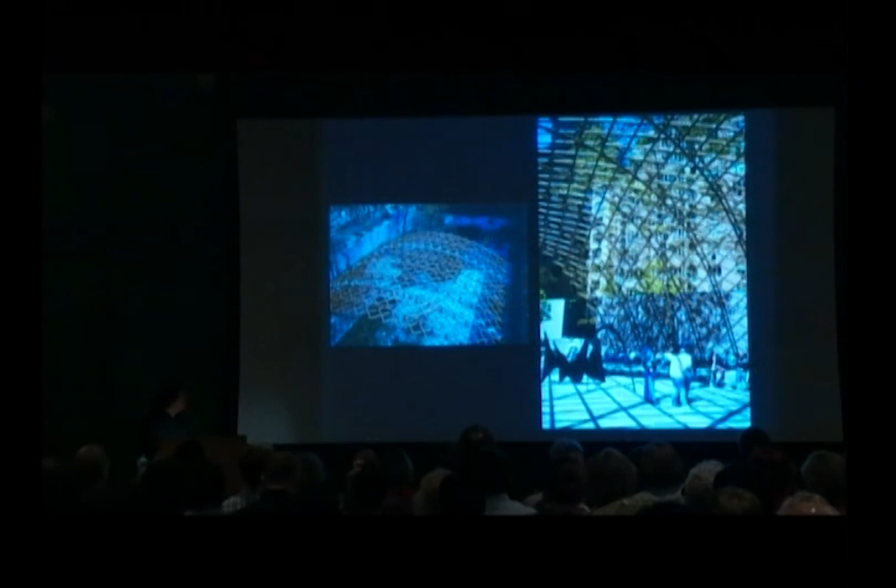Next, please. This is a small museum for the history of the canal in Bourgogne, near Dijon in France. And this is a small structure covering the old boat, and also this is a small building for the institution for this museum. Next, please. And this is the first permanent paper tube structure in France.

This time we were asked by the authority to design the joint in order to change the paper tube in case it's damaged. Although it's perfectly waterproof, we had to design an interesting joint. Next, please. This is the aluminum cast joint with the wooden piece inside. When we need to replace, we just unscrew it, and this wood goes inside the tube. Then we just remove it.

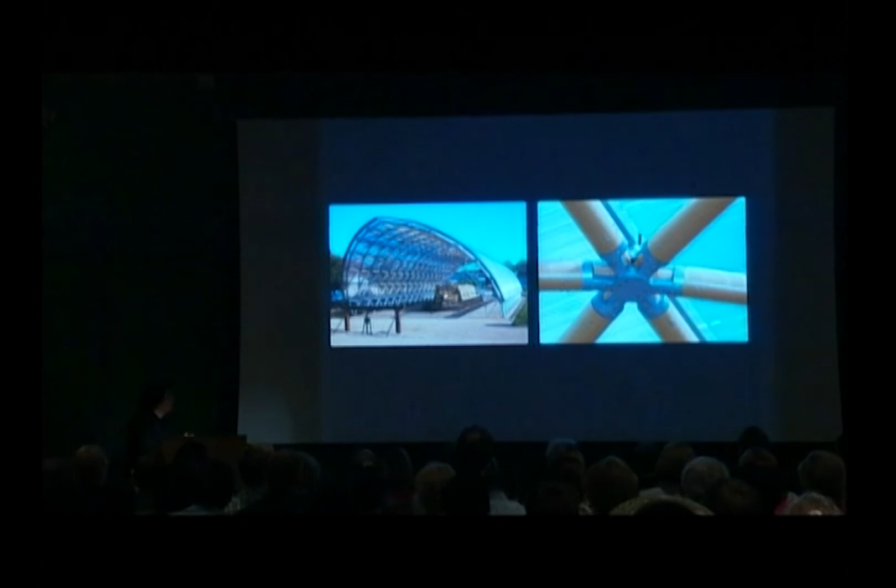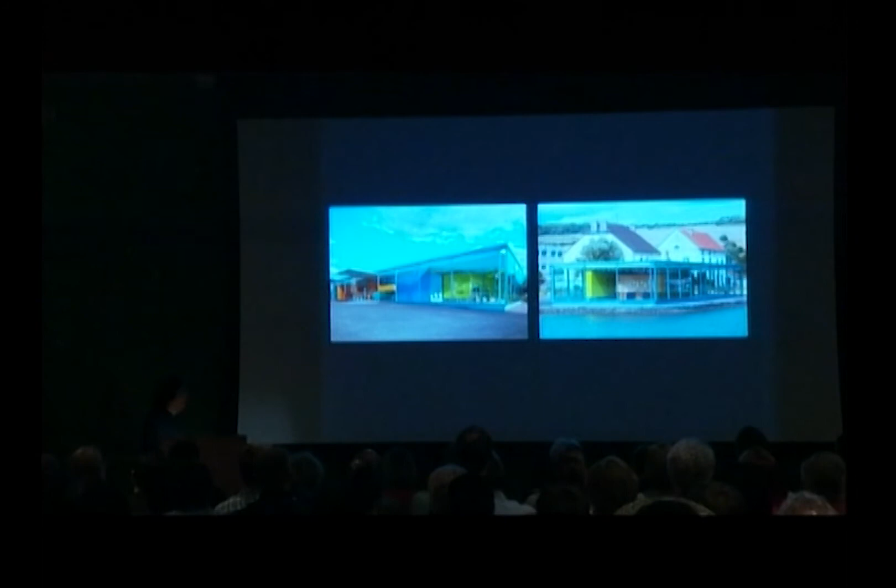So this is the first time we designed the joint in order to replace the paper tube, just in case. Next, please. And this is the institution. As usual, I don't have a big budget. And I asked my client, I want to design the exhibition as a part of the building, because I want to use the exhibition as a part of the structure.

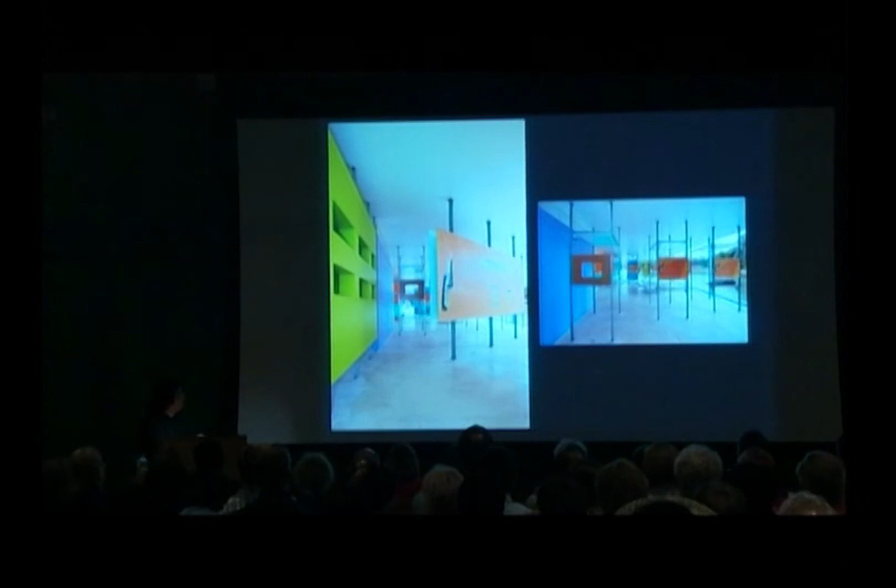Next, please. So I just went to the do-it-yourself store to buy L-shaped angles with holes. Usually you make your own bookshelf with this. I used two or four together, stiffening each other, to design the exhibitions and also the walls. And the roof is sitting on this. So the exhibition itself is supporting the roof.

Next, please. This is Rwanda, 1994. After the crisis, over 2 million people became refugees. And I was very shocked to see the photo on the right-hand side, because people were freezing with blankets. Because the UN just gave them only plastic sheets, they couldn't keep warm during the rainy season. So I thought we have to improve them, otherwise any medical care doesn't help them.

Next, please. Then I went to Geneva to meet some architects working for the United Nations High Commissioner for Refugees. And I was very lucky to be accepted as a consultant to develop my idea further, because of the following reason. This is a standard refugee shelter in Africa. The United Nations provides them plastic sheets, and the refugees have to cut a tree to make a frame to put the plastic sheet on.

Over 2 million refugees cut the trees. It used to be forest, but all the trees are gone, and so they go much further to cut more trees. So it's become very serious deforestation. The United Nations once provided them aluminum pipes, but the refugees sold them for money, because aluminum is a very expensive material in Africa, and they cut trees again. So aluminum pipe didn't work as an alternative material. That's why when I proposed using paper tubes, I was accepted as a consultant to develop this idea further. Next, please.

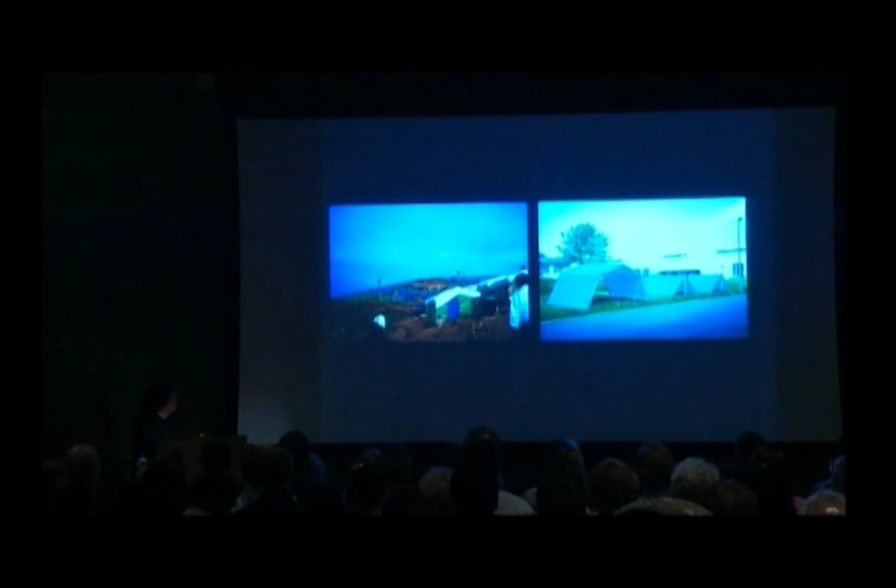And so I tested a few different types, and I made 50 prototypes in Byumba camp. Now all the Rwandan refugees came back home, and they're accepting refugees from Congo. I went there to do the monitoring testing. Next, please. I had to see whether this system is easy enough to be built by themselves. And also I had to check the waterproofing, and the difficult problem is insects. They have many insects, so we have to test whether this is good enough for them. So this is the monitoring stage.

Next, please. This is Kobe, 1995, after the earthquake. Over 6,000 people were killed. And in this town, all the houses totally burned after the earthquake. And there's the Catholic church, and I knew there were many Vietnamese refugees in this church, and I knew minority people usually have a harder time after disaster. So I went there to do something, because I was working for the UNHCR dealing with the refugee problem. Next, please. And I proposed to the priest to rebuild the church out of paper tubes, but nobody believed me in building out of paper.

So I commuted to this church from Tokyo every Sunday, and little by little I got to know people. And also I knew that the Vietnamese people were living like this in the park. On rainy days, all the floor gets wet, and on sunny days, inside is incredibly hot. Also, the neighbors tried to kick them out because they were afraid this park was becoming like a slum.

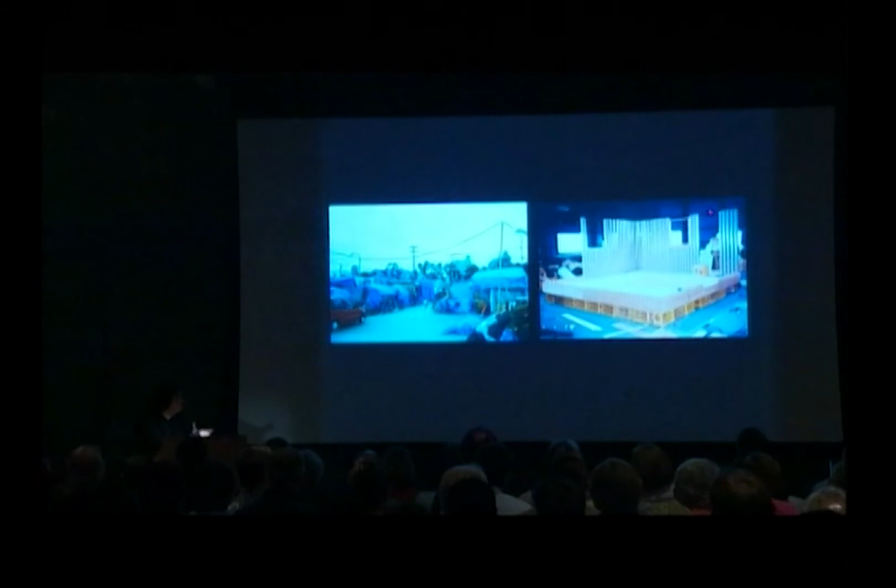In Japan, there are two major beer companies called Kirin and Asahi, and I particularly asked the Kirin company to donate the plastic beer cases because the other company makes its plastic beer cases red, which doesn't go with the color of the paper tube. Next, please.

During the summer, with students, I built the paper tube, paper log house for the Vietnamese refugees. It's a double layer of membrane with ventilation inside, with plastic beer cases with sandbags as a weight. Next, please.

And this is in Turkey, 1999. They also had a terrible earthquake. This is an army tent. They are no longer waterproof. So I brought the plastic sheet. From my experience in Rwanda and Kobe, I know that the plastic sheet is really useful in the first emergency stage of the disaster.

But at that time, Japan was having a financially difficult period, so I couldn't get money donated well. I asked the construction company to donate their plastic sheets. Usually they use plastic sheets to cover their scaffolding with their name and logo. And I brought them to distribute them. And it's very important to do this kind of public relations.

In Turkey, a local manufacturer provided paper tubes and plastic beer containers free. I worked with a local architect to adjust the Kobe type of paper log house to the local context and local climate. Children helped us to put waste paper inside of the paper tubes to make the wall more insulated. Next, please.

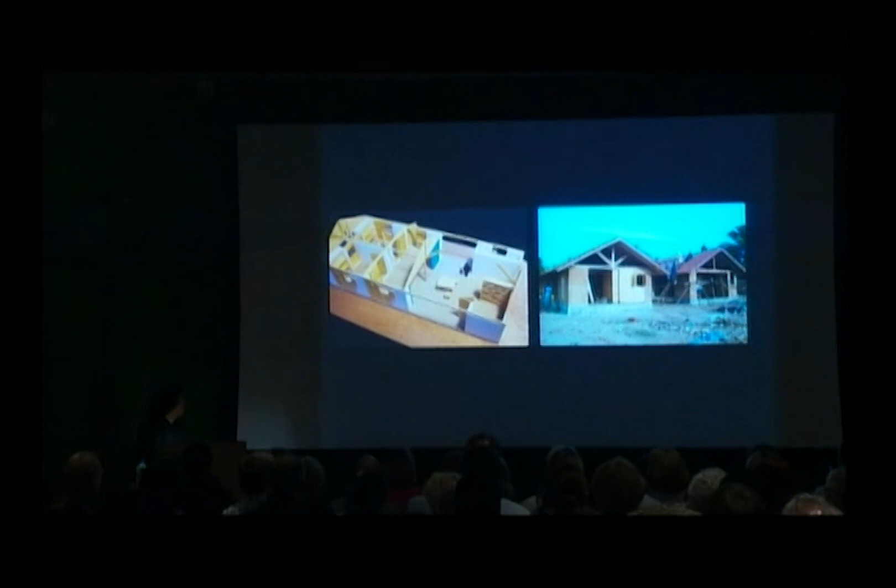And I made some roofed courtyards connecting inside and outside because usually it's very hot. They are walking and eating under the shaded area, under the roof. Next, please. And this was after the tsunami. And this is right now. We built 50 units already, and we are still building. Next, please.

This church was there until last year. They decided to redevelop the whole area, and I was asked to design it. And although we wanted to keep this church there, because of new fire regulations, we cannot keep it. We are very lucky that some Taiwanese people, who also had a terrible earthquake in 1999, asked us to donate it. So we shipped it over, and we are rebuilding in September. So this church is having a second life in Taiwan.